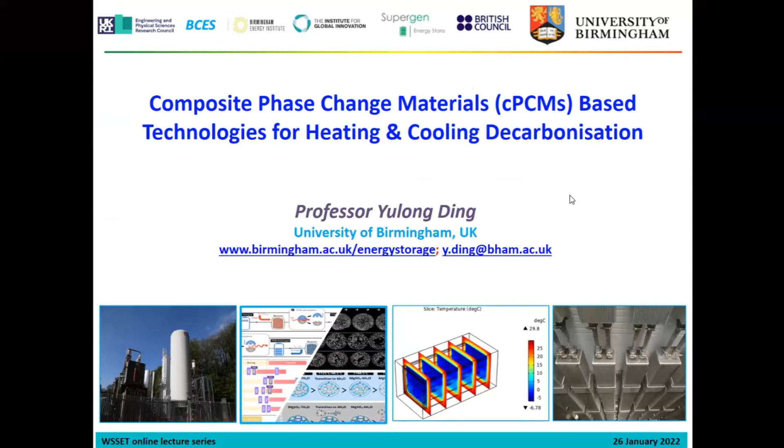And just because the material side probably is a bit tedious, I might talk at a slightly higher level. So my talk will be in three fairly short parts. I'll convey some key messages, which I believe are right, and secondly, I'm looking at the concept and then give a couple of examples if time allows.

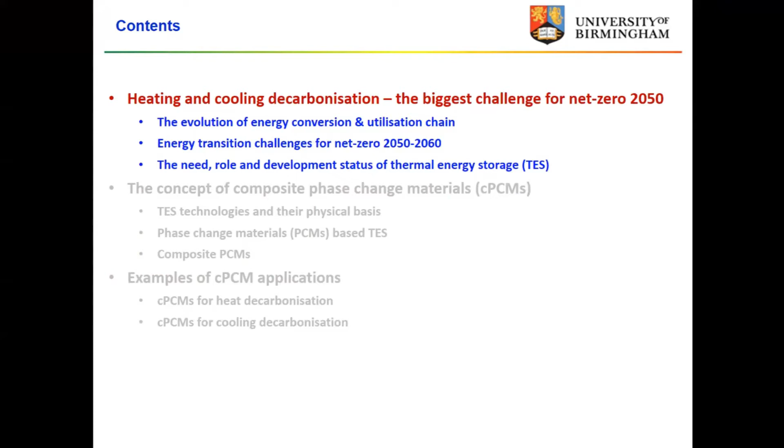So first, I'll look at heating and cooling decarbonization. What are the biggest challenges? I'm going to start with the diagram, which probably many of you have seen. The key message of this is that globally, over 90% of the energy budget centers around heat conversion, transmission, and storage, which means today thermal energy is at the heart, and fossil fuels do provide energy storage functions today, and actually the role of energy storage is not very high today. So that's message number one.

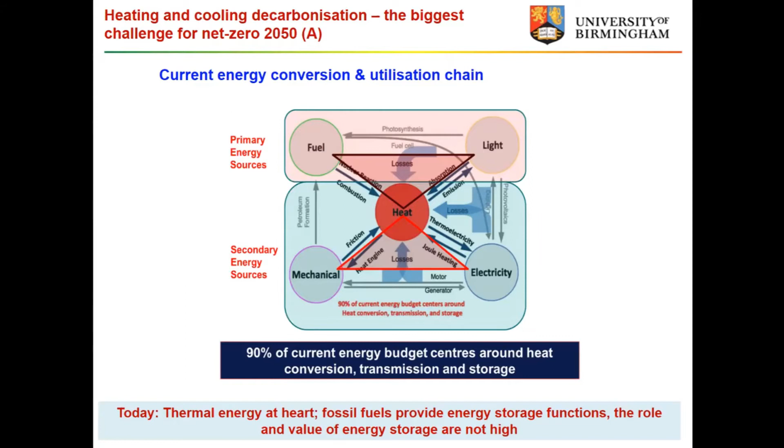Secondly, if you look at future 2050 to 2060 scenarios, I'm still using the same diagram, but I think the fuels will become a different combination of primary and secondary energy sources, including green, blue, or brown hydrogen, for example, and renewable energy will be dominant. And I believe heat and cold will remain at the heart. And we know renewable energy can't provide energy storage functions, and energy storage will have a greater role to play in the future. That sets the scene. So essentially, that's my thinking. Probably lots of other people are thinking that as well.

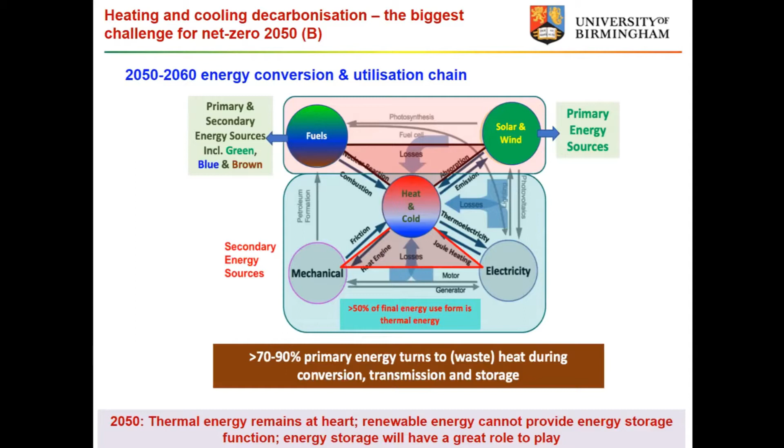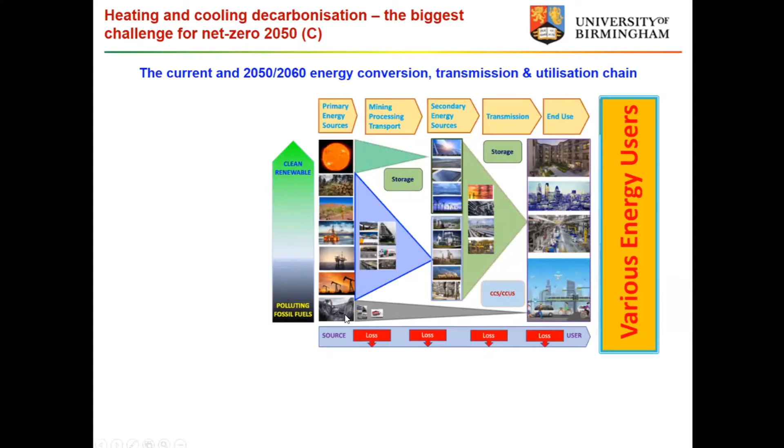So the third message is if we look from today to the future. Today we're using fossil fuels, and afterwards is clean energy in the future. If you look at this diagram from left to right, then we have a few key messages I want to convey. The first is, today and in the past, we have just a couple of energy conversion steps from energy source to our end users. And in the future, in a fully renewable energy world, this will increase. So we will have probably up to 7 conversion steps.

We know every step has losses, and most of the losses go into heat, thermal energy. Which means we have to take efficiency as more important than ever in the past and today. Lots of people argue that renewable energy is free and we can use as much as we want. But the problem is efficiency. If efficiencies are low, then we will consume more resources. We take more land and will increase infrastructure investment as well. So those are key messages.

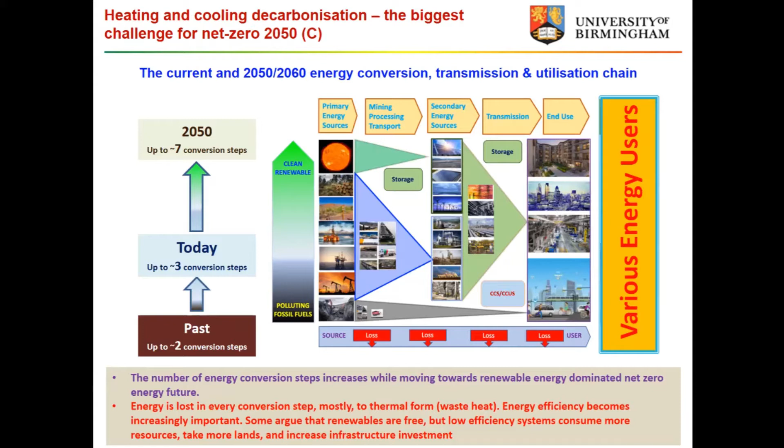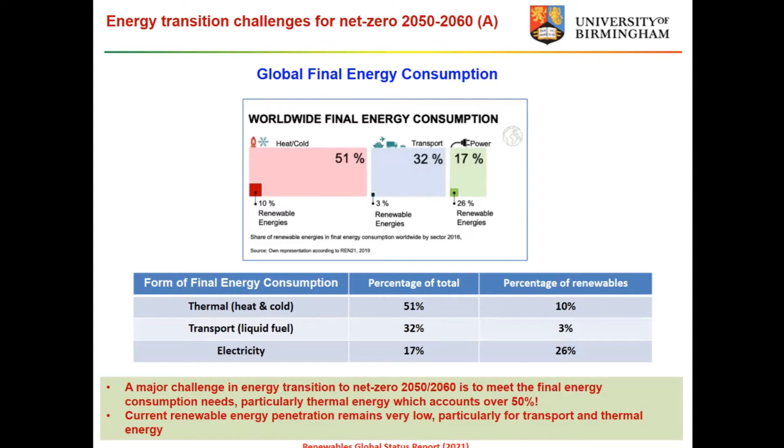Another message I want to convey is global final energy consumption. If you look at the portion, heating and cooling is roughly 51%, transport 32%, and power, which is electricity, 17%. Of course, we use power for heating and cooling, and for transport, but our infrastructure does not take that. So essentially, the major challenge for the energy transition to net zero 2050, 2060 is to meet the final energy consumption needs, which is predominantly thermal energy, over 50%. And I would say that will probably be more than 50%, as I will show shortly.

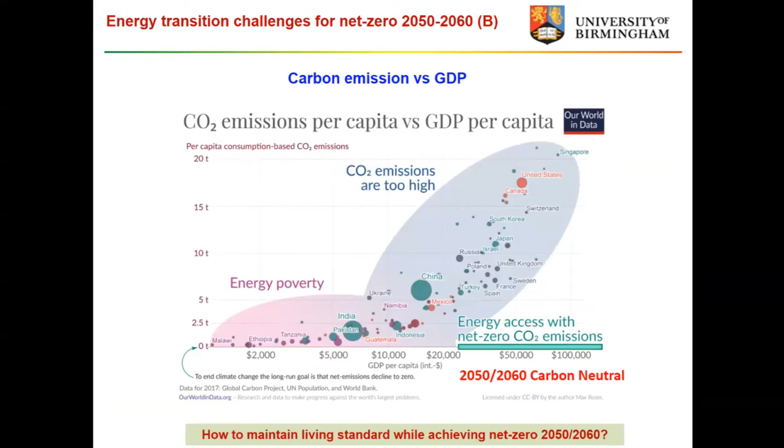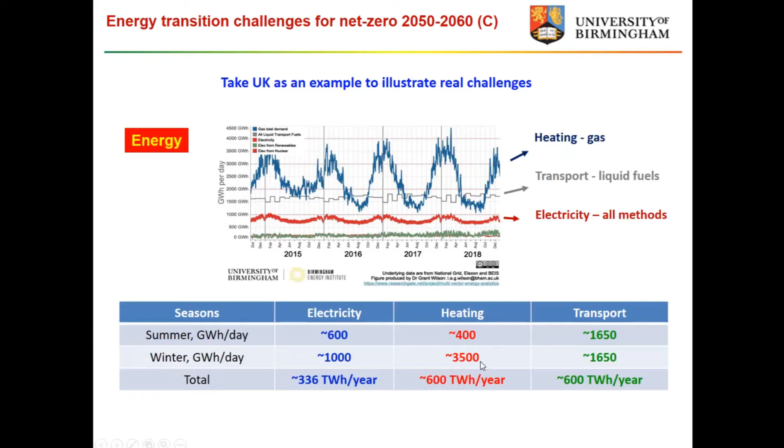If you multiply by that, 360, you get roughly the year, which is about 330 to 340 terawatt hours per year. But for heating, it's between 400 to 3,500, which is roughly 10 times. And transport is still almost constant. So again, this illustrates that thermal energy is a main challenge for achieving net zero by 2050 to 2060.

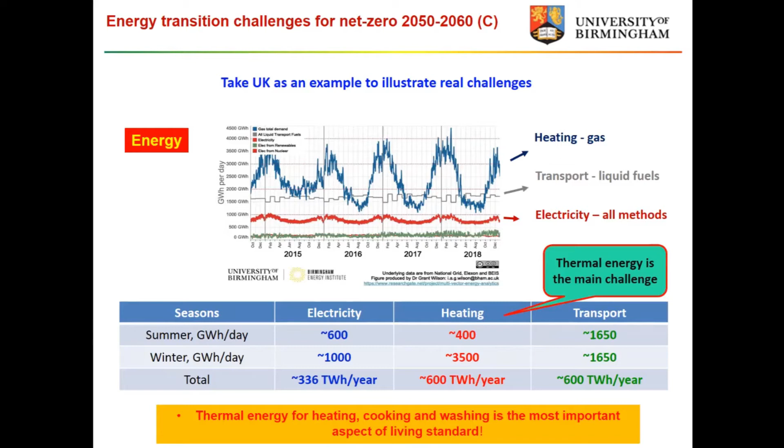And also heating is essential for cooking, for our heating, for washing. It's a basic aspect, but the most important aspect of our living standard. And last but not least, the message is cooling for the future. If you look at this projection, from around 2050 to 2060 the energy demand for cooling will be exceeding that for heating, of course partially due to climate change.

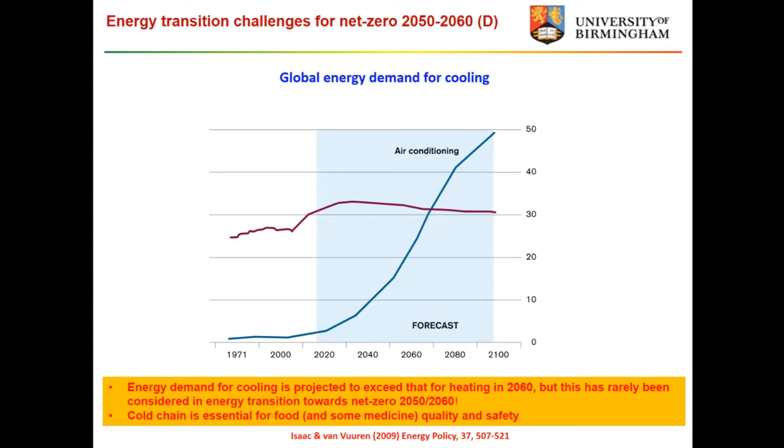So essentially, if we don't take that into account, we will not be able to achieve net zero by 2050 to 2060, because we know heating accounts for about 50% of final energy consumption. If you add cooling, that clearly will increase that portion to maybe 60, maybe 70%. That depends on how you calculate it. We know the cold chain is essential for food, for medicine, for quality of life, and hence to maintain a standard of living. That's important. So that's the first part.

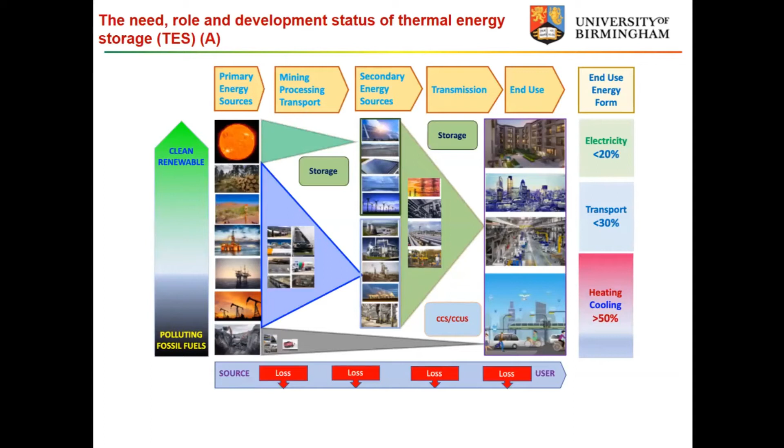Second, the role and needs for thermal energy storage, which a lot of you already know. I'll start from that as well. In this diagram, there are technologies for generation, for conversion, storage, and transmission and distribution, and there are energy utilizing technologies. Actually, lots of those are already at a high TRL level, mature, although they're not necessarily economically sound, but there are lots of R&D topics as well.

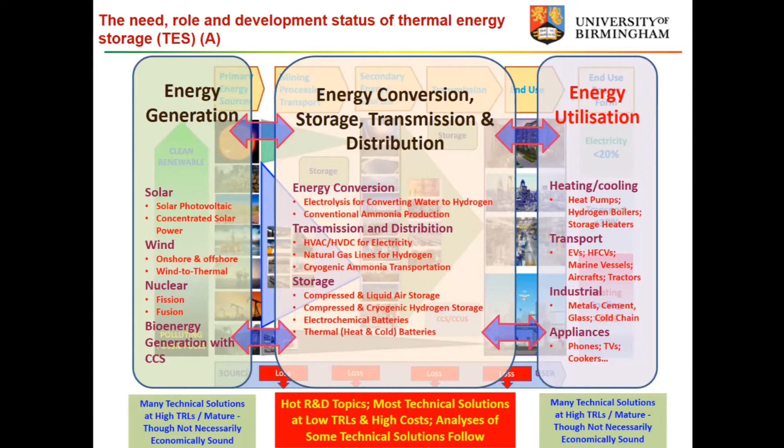So basically, I want to illustrate a few technologies which are used or emerging and regarded as a magic bullet for the future. I'm going to take a couple of examples. The first example is the electrification of transport, pure electric vehicles. Of course, those data are probably from 3-4 years ago. There are some assumptions for this.

I think thermal storage can replace air conditioning on vehicles, and hence you can actually enhance the overall efficiency. And I think the weight of a thermal store is probably similar to the air conditioning system. So that's the message I want to convey.

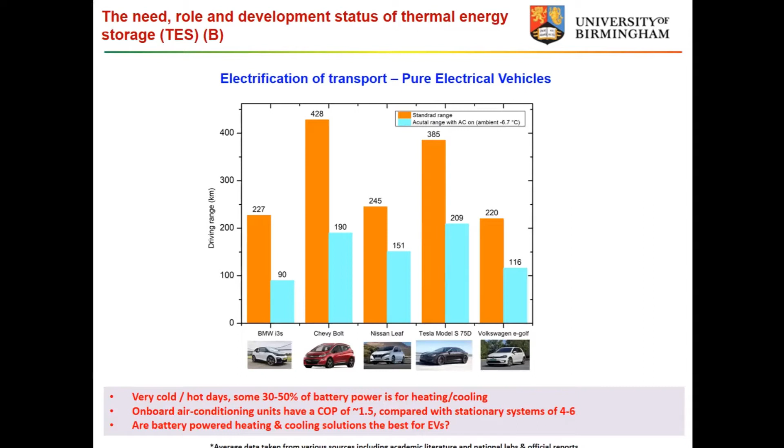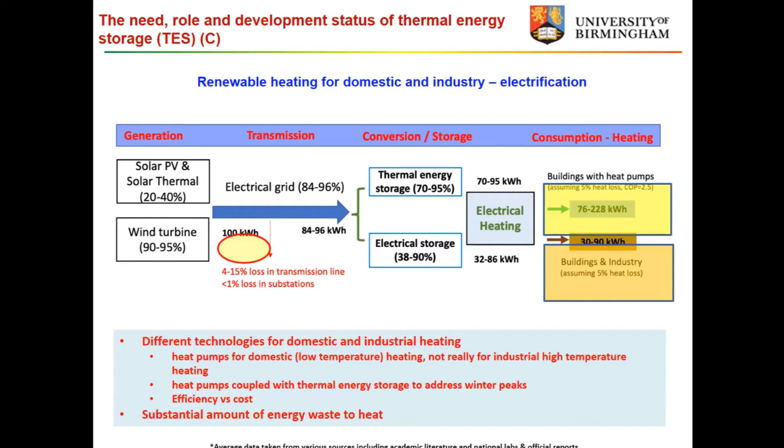Of course, heat pumps are trendy technologies that have been regarded as a magic bullet. But the key thing is they are not really for industrial heating. Industrial heating needs a high temperature, which heat pumps cannot provide. So for buildings that probably would work, but for industrial heating you only have efficiency of either 30%, or if you use some other technologies, probably higher. So there is lots of work to be done, and thermal storage has a great role to play here.

So if I turn back to renewable energy for domestic heating using hydrogen, from sources to consumption: if we use the hydrogen economy, assume 100 kilowatt hours of electricity from renewables, and you produce hydrogen. This is 100 kilowatt hours of electricity produced.

You can produce about 45 to 71 kilowatt hours in terms of high heating value, which means 100 kilowatt hours of electricity can produce 1.1 to 1.9 kilograms of hydrogen. And you have two options: either use a fuel cell and provide heat and power, or you can also combine that with heat pumps again.

So the key message here really is efficiency is not very good for domestic heating using hydrogen. But hydrogen heating has value for industrial heating. So that's the message as well. Not everyone would probably agree, but I think the ballpark numbers are here, and I'm happy to debate

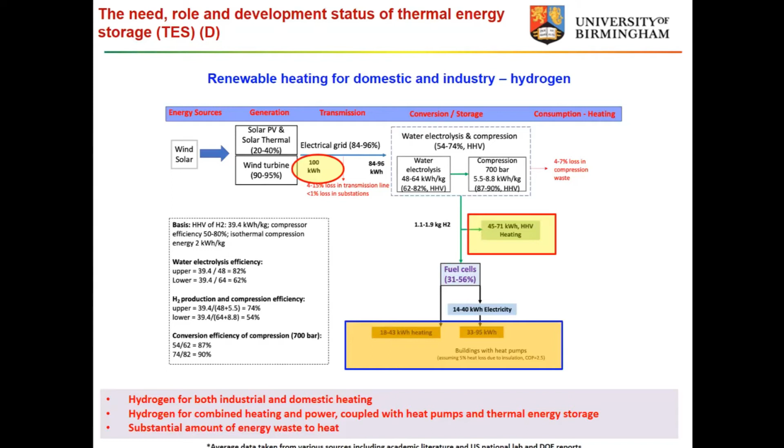on those. And another thing is, thermal energy storage has a function to play in the future in electronics cooling, telecommunication, data centers, AI and autonomous vehicles.

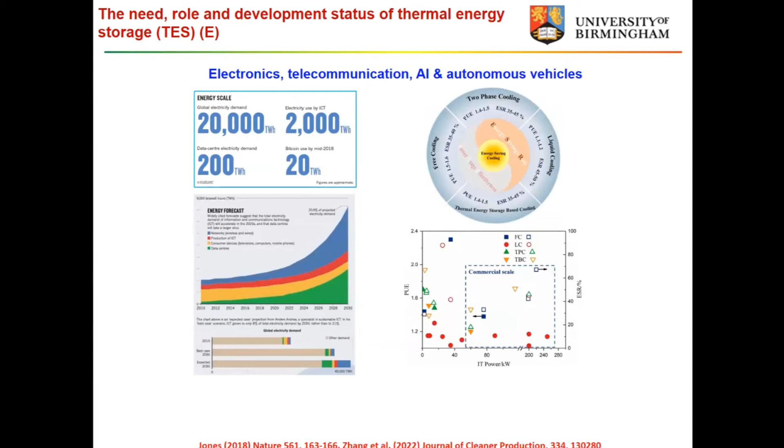There was a debate on Radio 4 this morning. I was listening. So, future vehicles, who is responsible if the vehicles drive over the red light? Is it the supplier or the drivers? Interesting. But anyway, it relates to it.

So the key message here really is that ICT consumes about 10% of global electricity supply, and for data centers, roughly 40% of the electrical supply is consumed for cooling, and most of that is waste heat. So again, the challenge here is how do we increase the efficiency of data centers or telecommunication stations.

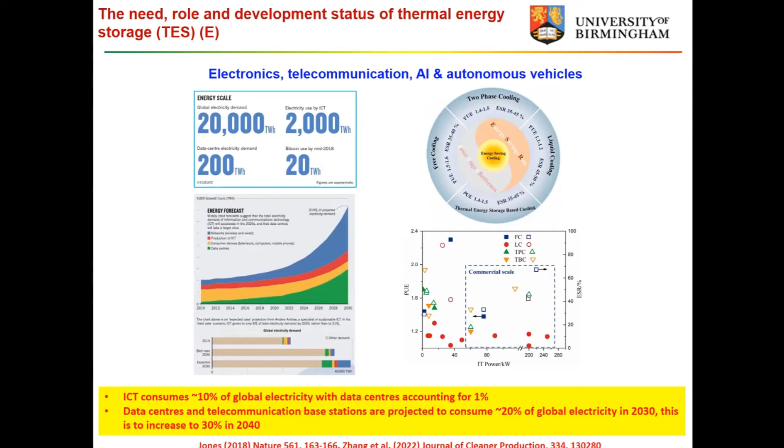And bear in mind, in 2030, the ICT consumption of electricity will increase by about 100% to 20% of global electricity production. And this number will increase to 30% in 2040. This is not my prediction, but it's based upon a few credible sources, which are listed here.

So many of you would know the storage technologies, and what I want to emphasize here really is that thermal energy storage has been de-emphasized, and we have not been doing a good job in advocating the actual fact, which is pumped hydro takes roughly 90%, no wonder about that. But non-pumped hydro storage roughly 10%, batteries about 21%, thermal mechanical nearly 80%. So those are the data.

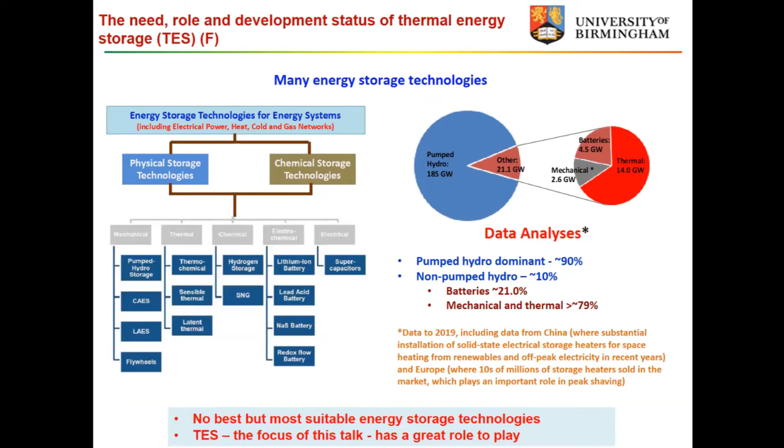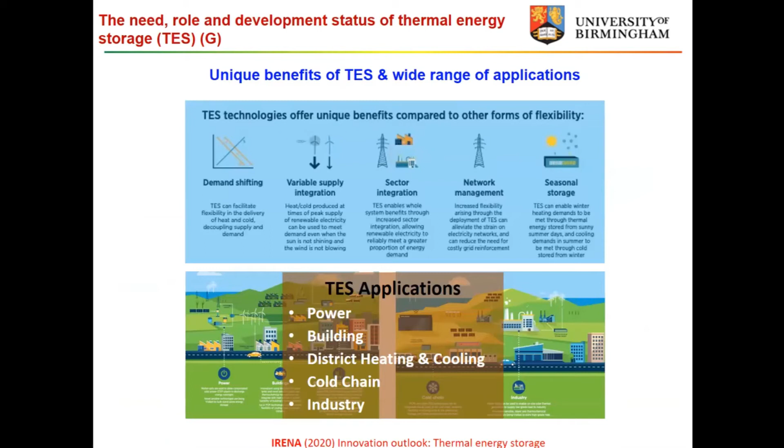In summary, thermal energy storage has a great role to play. Those are reflected in the recent IRENA report, where I led part of the technical part of the report. I'll just list that for power, for buildings, for district heating and cooling, for the cold chain industry.

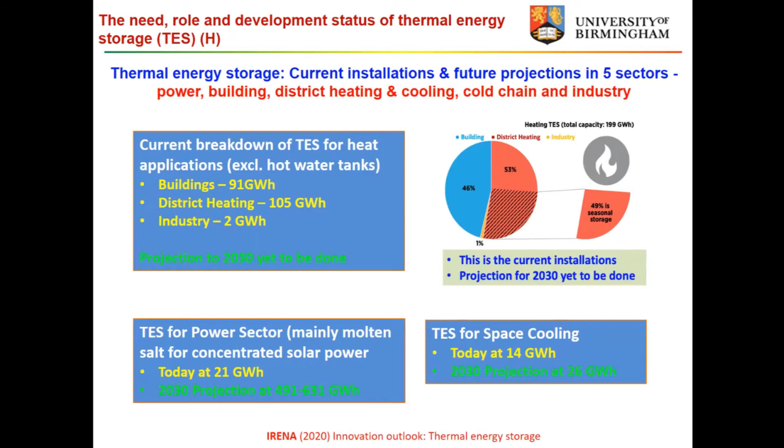Some data are shown here, I'll skip that, which would mean significant growth in the future for heating and cooling using thermal energy storage technologies. I'll leave some of those data here for you. Of course, if I summarize those data, the 2030 projection will be a few times more than what we have today.

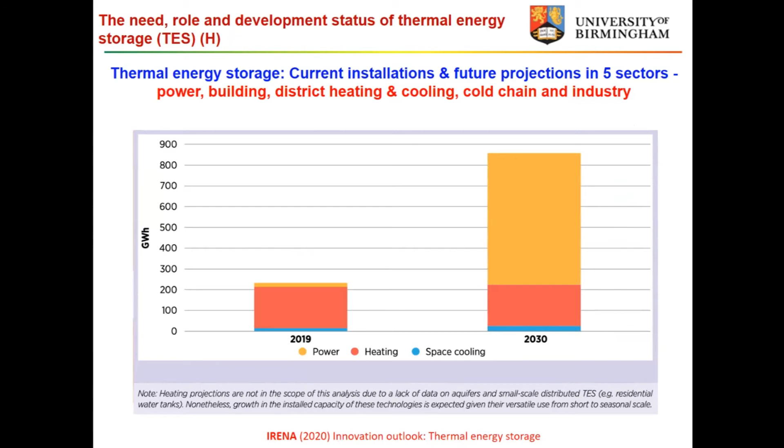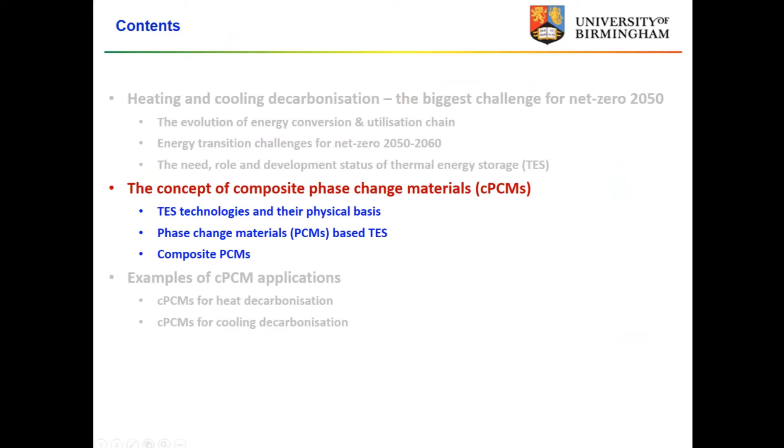So I'm going to get into the more technical side, which is about composite phase change materials. I'm going to cover the physical basis of this, and then a very short overview. So first, what I want to say is that there are 4 fundamental phases and 8 phase change processes, and many of you would know that already.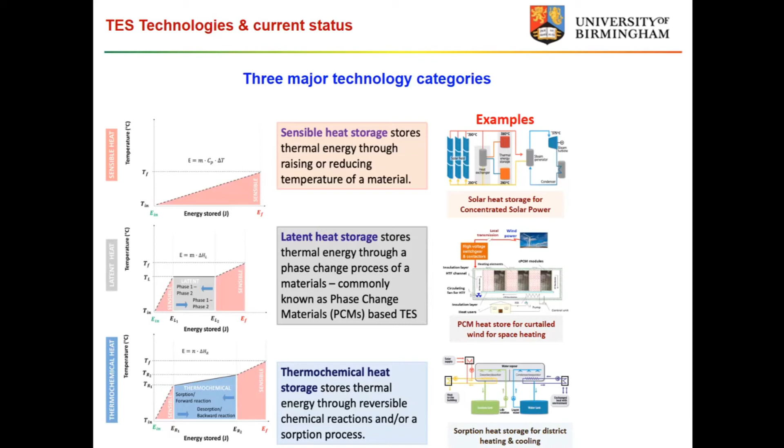The right-hand side is a diagram roughly illustrating today's state of the art. Sensible heat storage has been used for over 200 years, from the blast furnace hot air stove, which has been used for many years. Latent heat storage is said to be at TRL level 2 to 5. Actually, some PCMs already have large-scale applications.

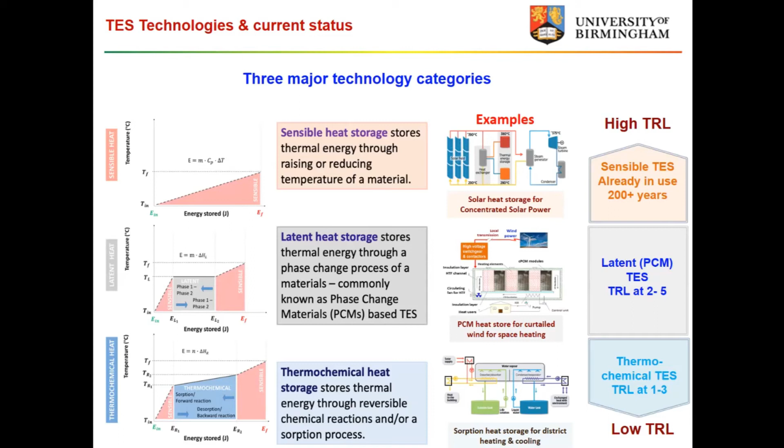For example, the cold storage materials for cold chain transportation have been used for 30-40 years, and also in some demonstrations as well. But overall, it's a medium TRL level. Thermochemical is at a fairly low TRL level. Of course, there are a couple of examples which have a high TRL, but overall it's at a fairly low level. So I'm going to mainly look at phase change materials.

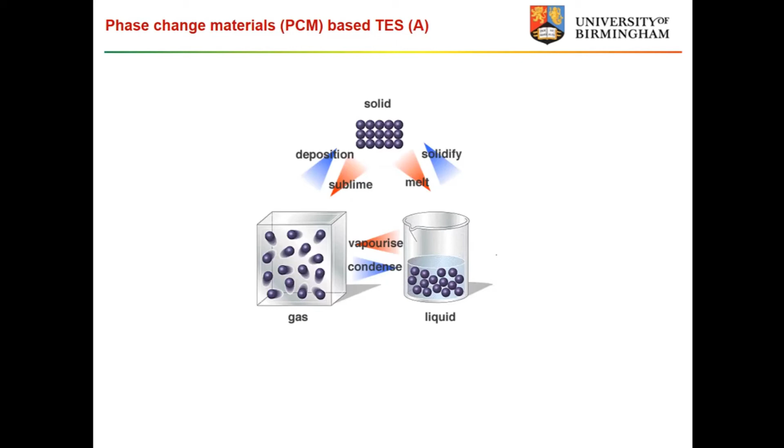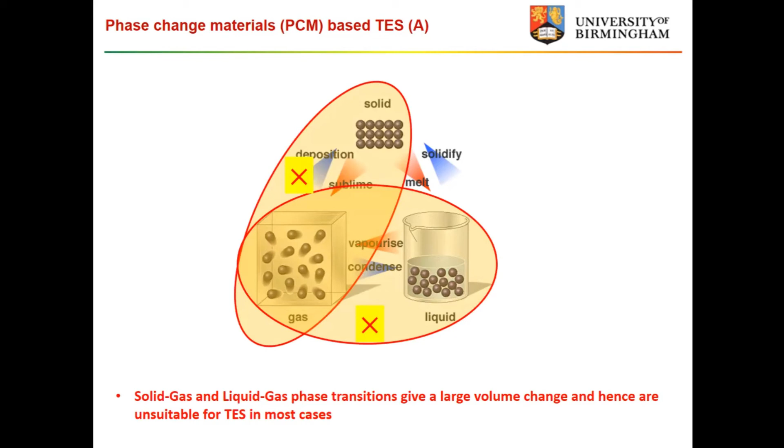If you look at solid to liquid to gas phase, those processes are illustrated already in the slides I put forward before. But if we look at solid-gas and liquid-gas phase transitions, they give a very large volume change, and hence are not suitable for thermal energy storage applications in most cases. Of course, the Rankine cycle, steam generation, turbine power generation is an application, but it's not for storing heat. But solid and liquid phase changes are suitable.

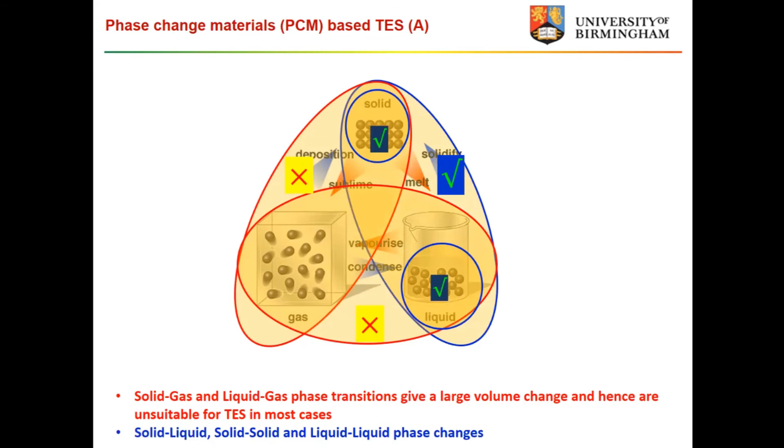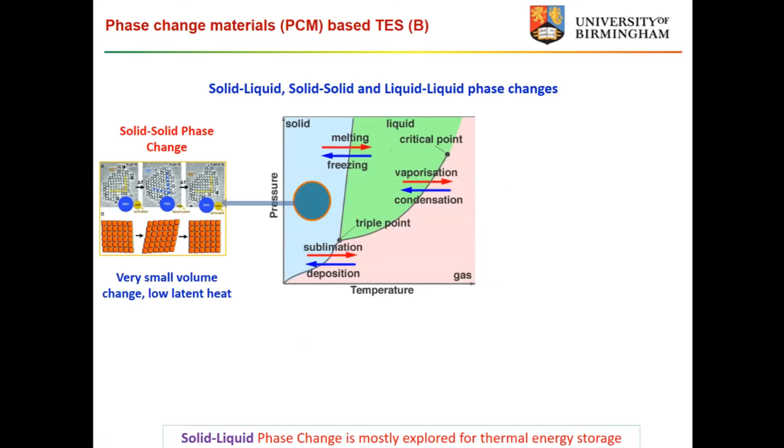Of course, there are some differences. Coming back to this one, if we look at a solid-solid phase change, there are potential applications which have very small volume change, but the latent heat is not very high in many cases; in a couple of cases you could also have high latent heat. If you look at liquid-liquid phase change, there is a very small volume change and low latent heat as well, particularly in biological applications, the reconfiguration of polymer molecules or biomolecules. There's some potential application in the future.

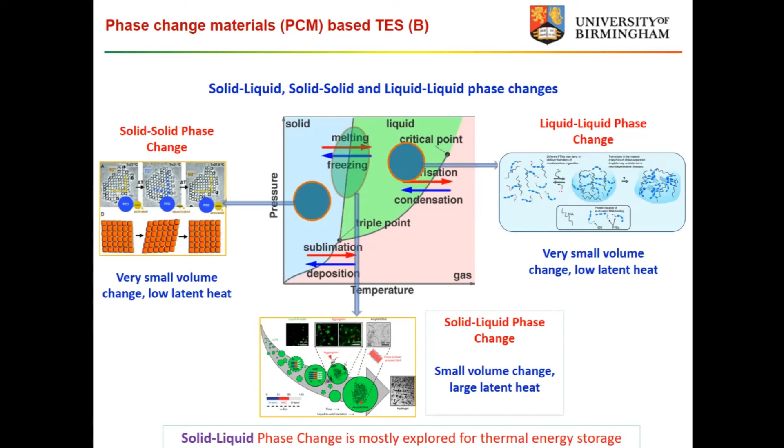Solid-liquid phase change: the volume change is fairly small, but not very small. Sometimes it can be 30-40%, but the majority of the materials have a fairly small volume change and large latent heat. The applications of those, most of you already know, so I've just shown that here. There are lots of applications for both short-term and long-term storage, so I'll skip that.

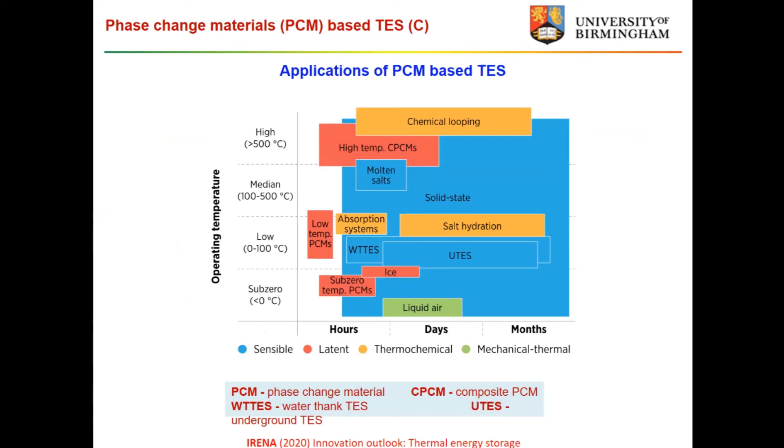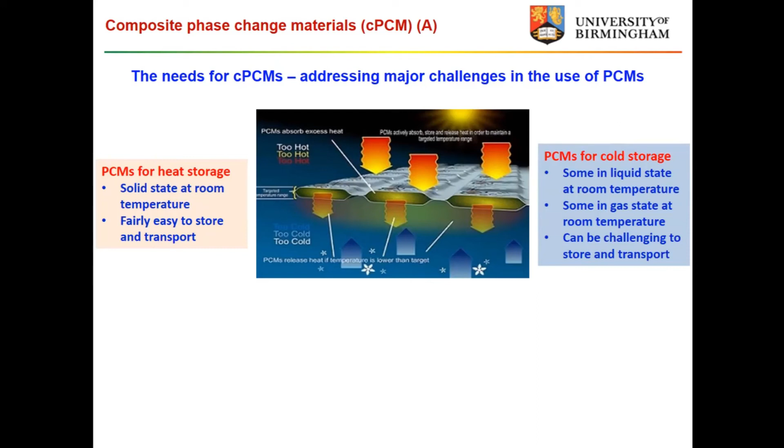And there are some other technical challenges. There's shape stabilization, for both heat and cold energy storage: how do we maintain shape stability? Thermal conductivity is an issue for some materials. Phase separation is a major issue for many cold energy storage materials we come across. Corrosion issues, both for heat and cold energy storage.

Supercooling is a big issue in many cases, because, for example, in our air conditioning system the feed temperature is probably about 7 to 11 degrees. Feeding is about 7, maybe returning is about 11 or 12 degrees. So you have a very low temperature range for being integrated with the current air conditioning system. Data centers have the same issue.

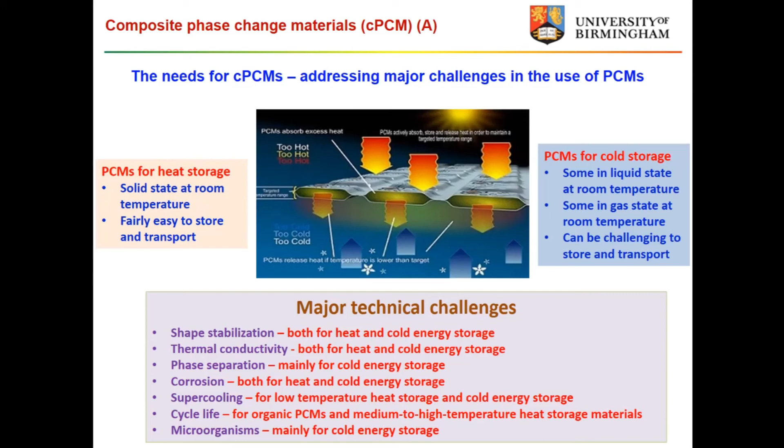Cycling life is an issue, particularly for organic materials and medium to high temperature heat storage materials as well. We've seen lots of those issues after a couple thousand thermal cycles, and even for the salts for high temperature PCM, we see issues after about 3,000 cycles. Also for cold energy storage materials, there are microorganism issues, growth, mold and so on. Those are issues we have come across, and that's the reason why we need it.

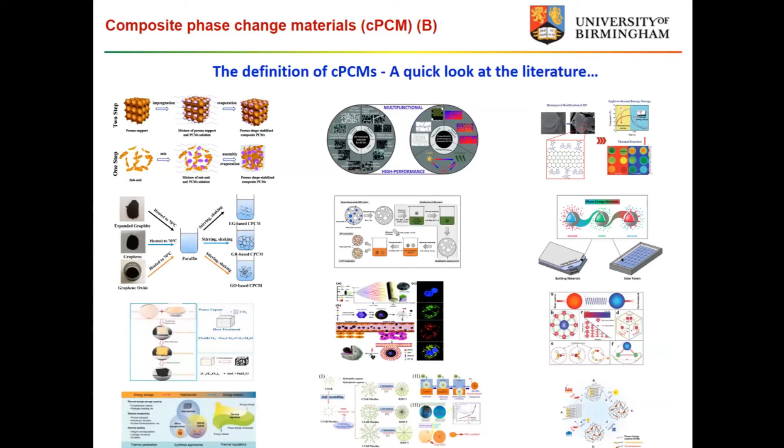So let's define what composite phase change materials are. You can see all sorts of definitions in the literature, and I'm not going to go through those in detail. But fundamentally, a composite material is a material made from two or more components with very different chemical and physical properties, with properties unlike the individual elements. Structurally, the individual elements remain separate and distinct.

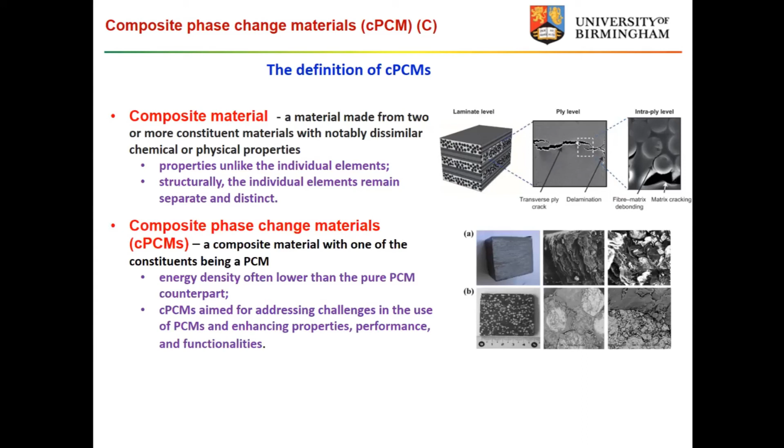Those are the composite materials definition. So for phase change materials, it is similar, but they just need to have a function, which is the phase change. But having said so, despite some similarities, composite phase change materials for heat storage are often formulated and manufactured in a different way from those for cold energy storage. And also composite phase change material products for cold energy storage have a very different microstructure and performance enhancement using different methods. So those are differences.

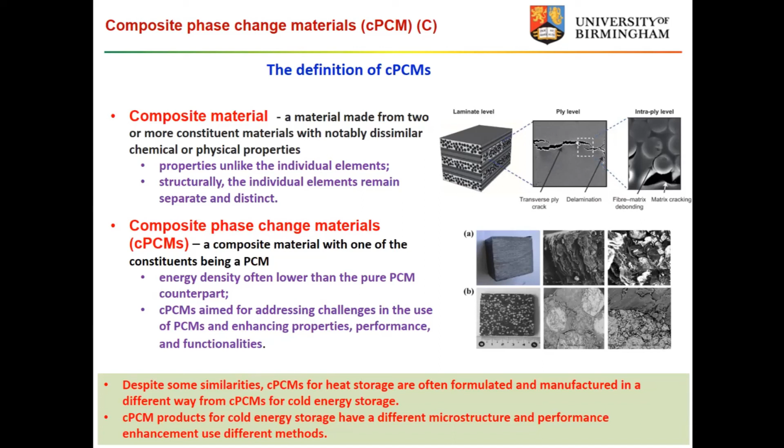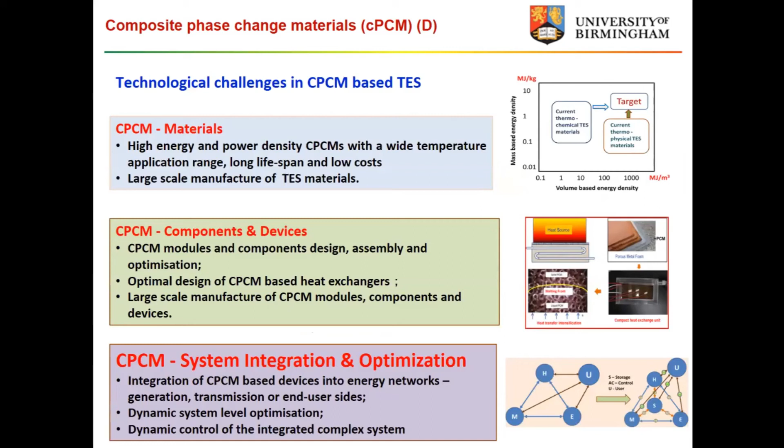I won't have time to give too much detail, but I just want to let you know there are some scientific and technological challenges. The materials, component, and system integration still have lots of challenges. I will skip that. And the scientific challenge is a massive multiscale problem, from the nanoscale across ten orders of magnitude.

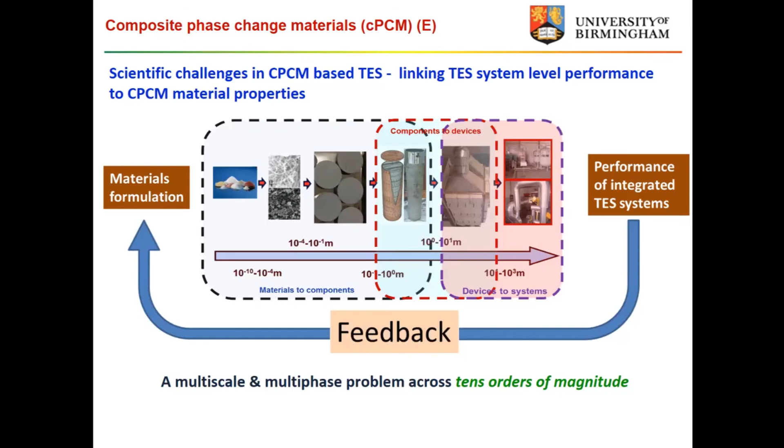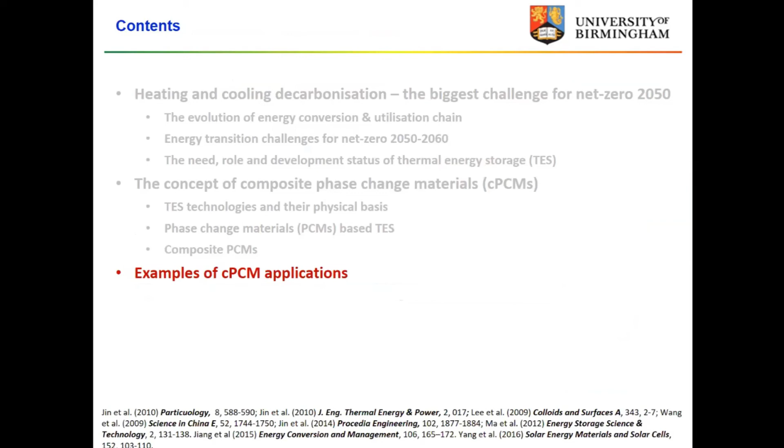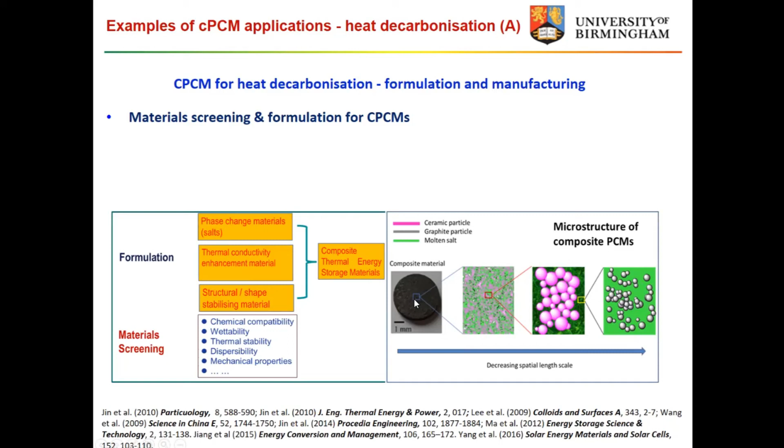So finally, I'm going to use probably one minute for giving examples of CPCM applications. The first application is for heat decarbonization, and we've been working on that for a very long time, we started this type of work many years ago. From material screening, you have to have different materials which are compatible physically and chemically, with good dispersibility when you mix them, and when you produce them, good mechanical properties. Essentially, you have a skeletal material, a heat transfer enhancement material dispersed in the phase change material, and then you form the microstructure and a shape-stabilized module. And of course those also cause manufacturing issues.

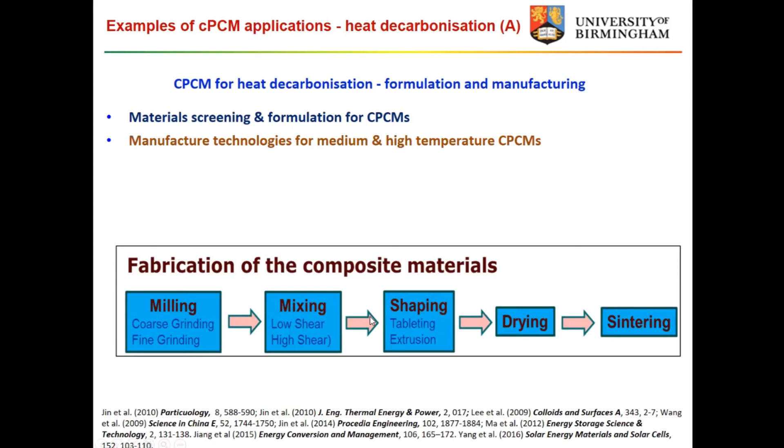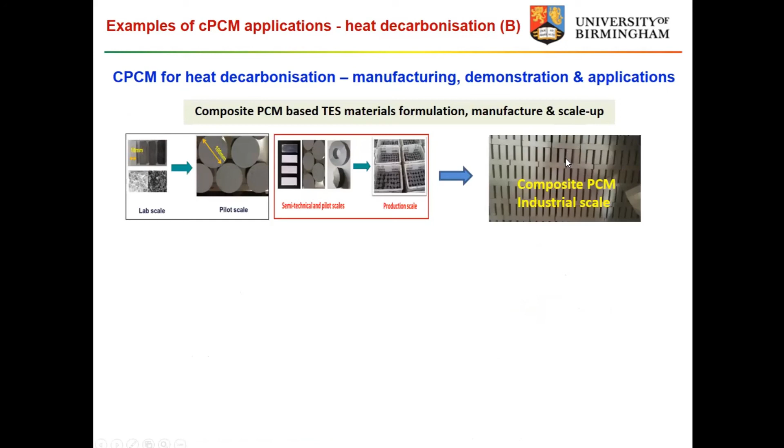One of the methods we've been developing has been used in conventional food production and minerals, and also detergent and pharmaceuticals, meaning mixing, shaping, drying, and sintering. Those are examples from lab scale to pilot scale, and from semi-technical to production scale. Through the last probably 15 years of development, we have managed to make the materials at hundreds of tons per day capacity.

And we have done quite a bit of demonstration, from very small scale, about 25 kilowatts, 100 kilowatt hours, to medium scale, which is 200 kilowatts, 2 megawatt hours, and to the world's first large-scale composite phase change material application near the Kazakhstan and Xinjiang border, which is 6 megawatts, 36 megawatt hours, which uses discarded wind power for space heating. So in short summary, today high temperature composite phase change material installations are more than 300 megawatts and over 1.2 gigawatt hours as of last year.

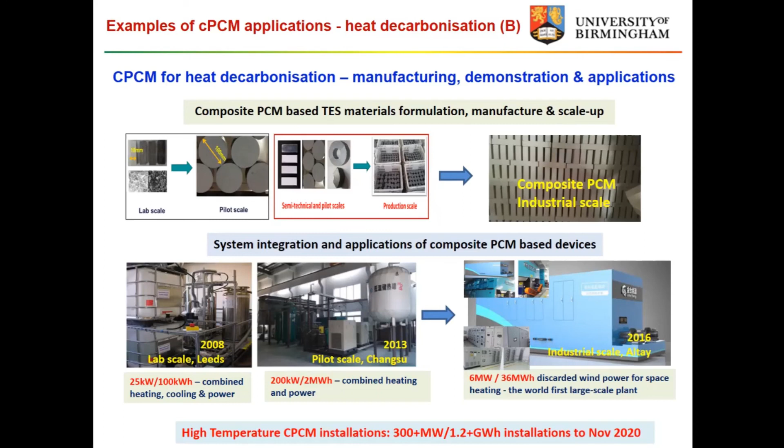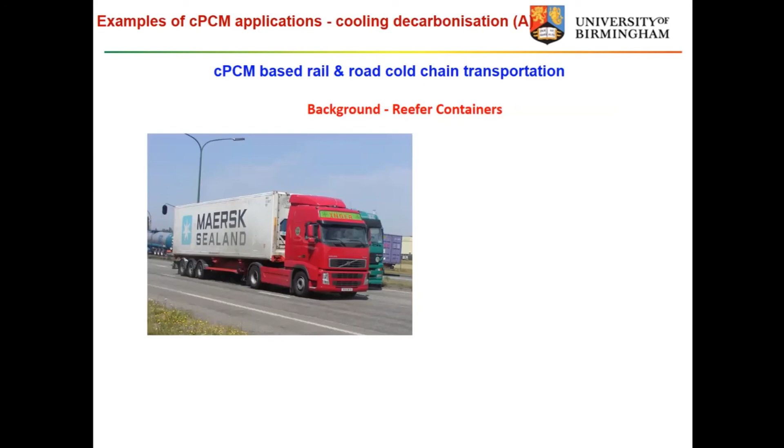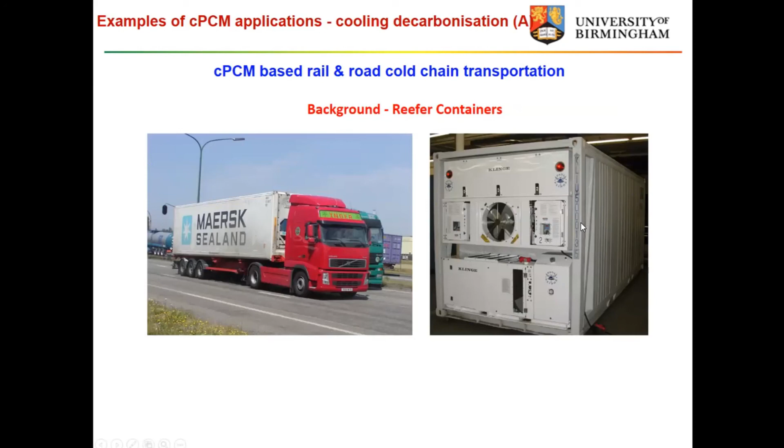The second application is composite phase change material for cold chain transportation. The idea really is to replace the reefer container like the one shown here. If you open the back of this, you have the refrigeration system, a space inside, and of course insulation materials. The issues with this are that you use a diesel engine powered system with pollution issues, high operating cost because diesel is expensive, and temperature fluctuation because of the nature of the refrigeration and control system. And the cold chain can be broken if the refrigeration system fails.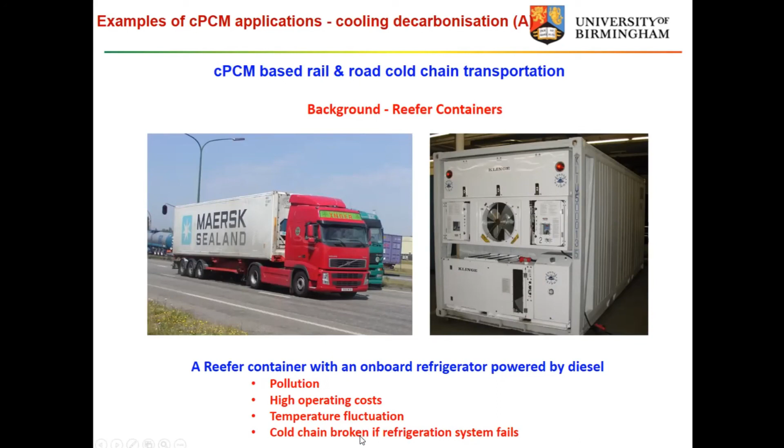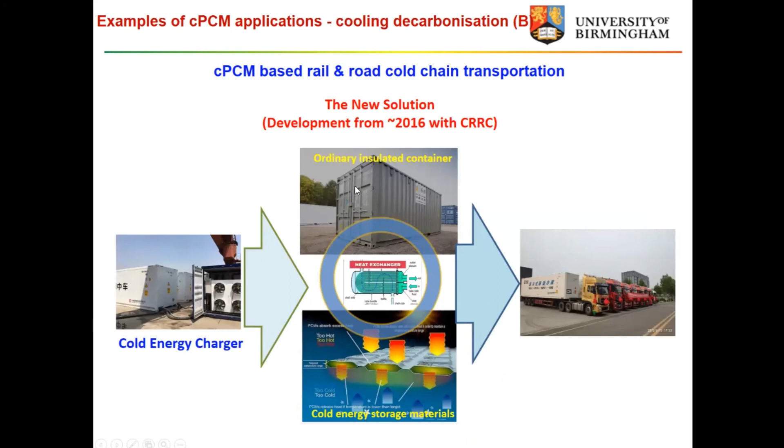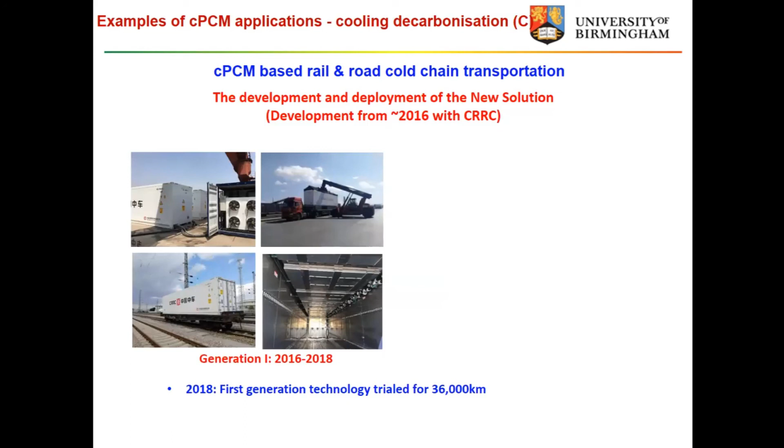So the way we did it was to replace that. We use an ordinary insulated container with phase change material, and we use a cold energy charger to charge those phase change materials, without a diesel engine or refrigeration system. So we basically put the refrigeration system on the ground, and we charge the container. The technology was supported by CRRC. We worked on it for about 5, 6, 7 years, and the first generation was trialed around 2018, with about 36,000 kilometers of trials across different climate regimes, in integrated rail and road transportation.

Then in 2019 we had a second generation, and now there are 62 vehicles functioning well across the region. Essentially one charge takes about 2 to 3 hours, but it can last for 7 days, and the operating cost was reduced by about 80% because off-peak electricity is cheaper than diesel. The system level COP is about 2.5 to 3.5.